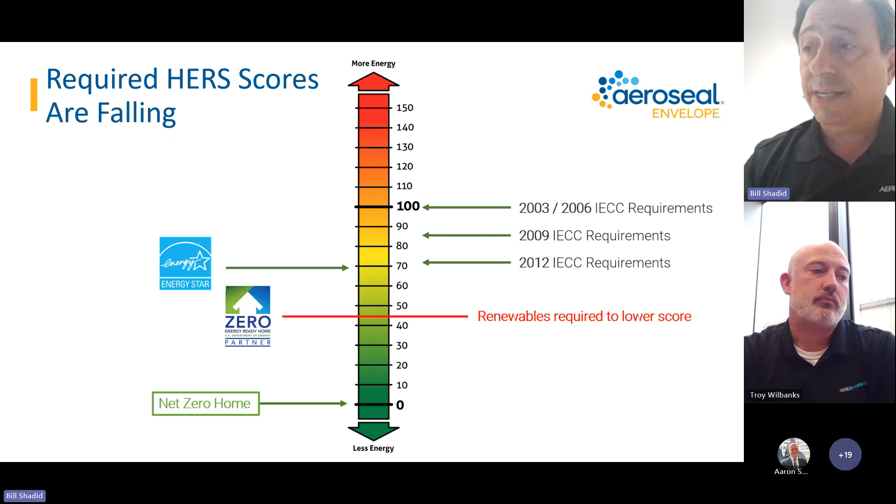When we think about HERS scores, that's a very common thing that we're used to looking at. When you look at the HERS scores over the years, they're falling. If you look on the right-hand side of the slide, the 2003 and 2006 IECC requirements had a HERS score of around 100. By the time we get down to 2012, it's falling. And to be zero energy ready, if we achieve a HERS score of around 45 to 47 and then apply a renewable energy source to that, we will achieve a net zero home. So that trend's been happening for a while. It just needs to get even lower to achieve net zero or zero energy ready. A good reference point for us.

Why are we talking about net zero now? Well, if you follow the housing industry, and this is both for single family and multifamily, demand for net zero is increasing. When we talk about net zero as a trend or the future, we like to say it's not the future, it's now. I'll show you a couple examples of that in a couple slides. But it's growing very fast. There's consumer interest and demand. There are increasing financial incentives, such as the Inflation Reduction Act that was passed about a year and a half ago. So more builders are actually including net zero in their offering to consumers or plan to do so in the very near future.

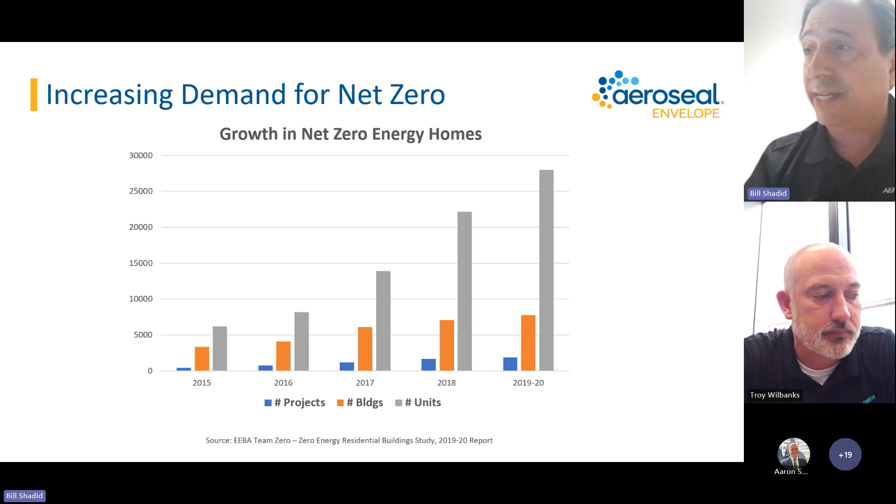Let's look at that real quick. This was some data from EEBA Team Zero, which is part of EEBA, so thanks so much for this great data. If you look at this chart, you can just see from left to right, going from 2015 to 2019 to 2020, the drastic increase in terms of projects, buildings, and number of units. What's really interesting to me is that the gray bar, the number of units, is actually growing faster than the number of buildings and projects. So what that says is you've got more multifamily coming into the spectrum. And that's really cool to see multifamily hitting net zero and zero energy ready. At the end of this presentation, we'll be talking about a very specific multifamily project.

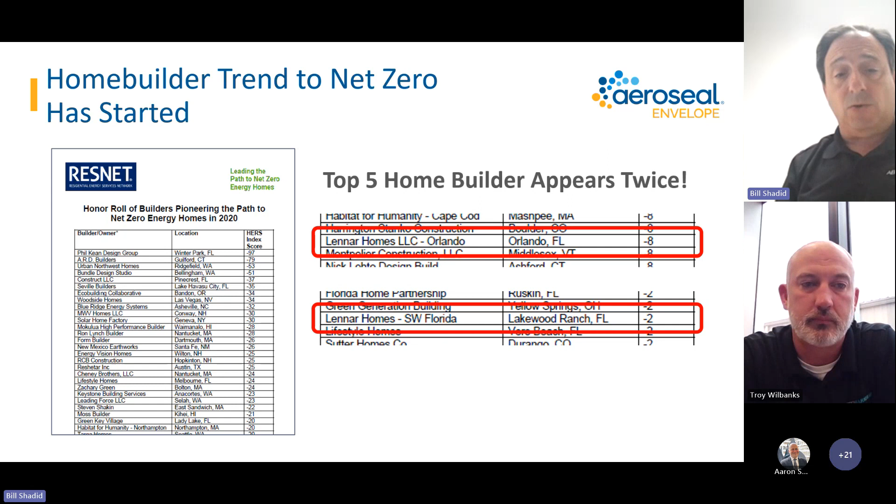Another thing I think that was really cool to see is that from RESNET, we looked at an honor roll of builders. This was from 2020. And what we need to look at here, I don't think is the detail, because it's a long list of builders that were actually pioneering and building some net zero energy homes in 2020. But if you look at some of the builders that are mentioned, there's a top 5 home builder, Lennar Homes, who's actually in that listing twice. So this isn't just local or regional, more specialty builders. Even the largest home builders are really taking net zero and zero energy ready seriously.

And that's actually supported very much by Beazer Homes, who's a big customer of ours. In 2021, in their ESG summary, they made a commitment that by the end of 2025 every new Beazer home will be zero energy ready and generate a HERS index score of 45 or less. And think about somebody who's building several thousand homes a year to make that commitment. It's a very, very big deal. And I think it says a lot of good things about where our industry is going.

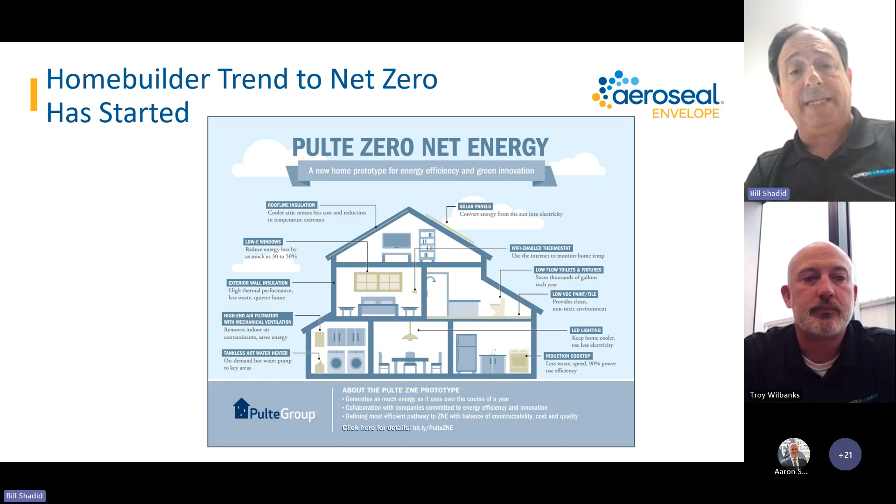Even Pulte has basically got content out on their blog and their website that speaks to what is net zero, how we're going to get to net zero. So again, some of the biggest home builders are really addressing this and moving forward with it. So it just speaks to the growing trend and the growing demand. And again, what we're going to cover today is how a tight building envelope can help you achieve the same thing. So I'm going to turn the presentation over now to Troy, who's going to take us through a number of slides around air sealing.

And Troy, just whenever you want to advance the slide, you tell me and I'll hit next. Perfect. Bill, definitely appreciate it.

So yeah, as Bill just mentioned, I'm going to cover air sealing the envelope. I'm going to cover it at a very high level, cover some of the basics surrounding what air sealing is, the control layers, what we need to focus on, some of the benefits and challenges, some of the questions, and then also focus on how proper air sealing can impact the build as a whole, the durability, as well as some areas where we can help address costs. So, Bill, next slide. Not the slide I was thinking, but let's roll with it.

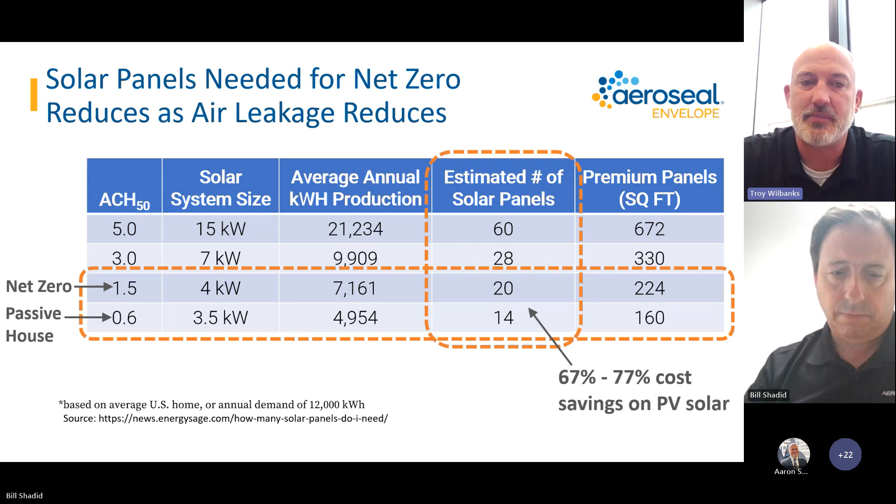So why is air sealing the building envelope so important? This was originally going to be the first slide to kick it off, but like I said, let's roll with it. So arguably, air sealing has the greatest impact on any build through the full process from design to occupancy. The DOE estimates that uncontrolled air leakage accounts for as much as 40% of energy use, which is a massive number. Now, that's the DOE estimate based on code-built houses.

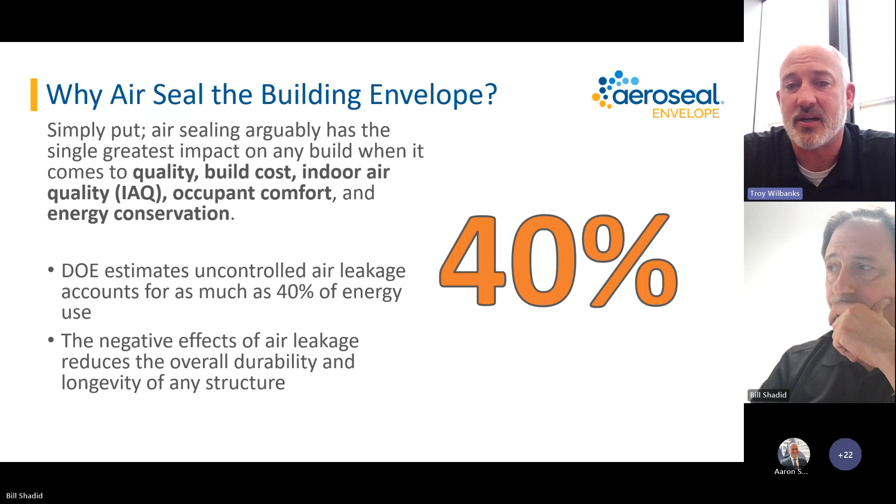When we're talking about net zero houses, that 40% is going to be knocked down to essentially zero. Net zero ready, depending on when the renewables are plugged in, is going to be drastically reduced. So air sealing the building envelope when it comes to efficiency is huge, right? And we can see that through study after study. Also, there's a lot of impacts, which I'll cover a little further, when we're talking about protecting the integrity of the build through the total ownership of the home, and also a lot of the negative impacts that can happen to a build if they're not addressed correctly. So next slide, Bill.

Beyond that, though, I like to call them the butterfly effects, if you will, of proper air sealing, and that's when we're really getting into occupant comfort, right? Building a structure and ensuring that the people that are in it really receive the maximum capabilities of that structure, whether it's living in, going to school, whatever that structure may be.

And a net zero home is going to do exactly that. So through proper air sealing, getting a really tight building envelope, you're going to have less pest intrusion, so less bugs getting in from the outside. Also, you're going to drastically reduce the transfer of smells and sounds.

This is huge in the single-family detached world, whether you're in a rural location or out west, dealing with pollen, or in some cases wildfires, or more of an urban area where there could be a lot more fumes from traffic floating around. That also then multiplies naturally in the multifamily type world, right? Where noise and smell are the number one and number two complaints by property management companies.

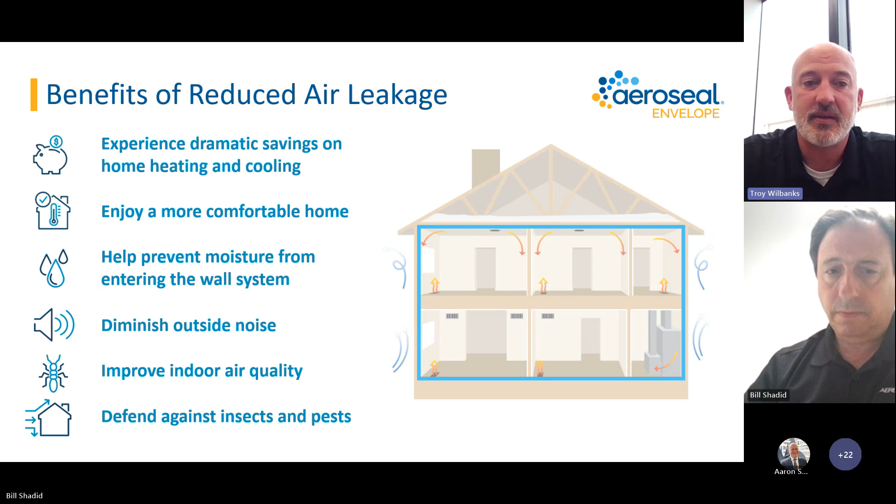Also, you cannot really buy that experience necessarily to identify where this air leakage is happening and properly air seal. So it's a huge challenge that we have, and we'll hop into it a little bit more in detail later on in the slides. But it's an interesting fact, and what this tells us is sealing the building envelope, coming up with an aggressive, repeatable air sealing detail that will address where the lion's share of air leakage is coming from, is a crucial component as you're approaching a net zero ready build. Next slide, Bill.

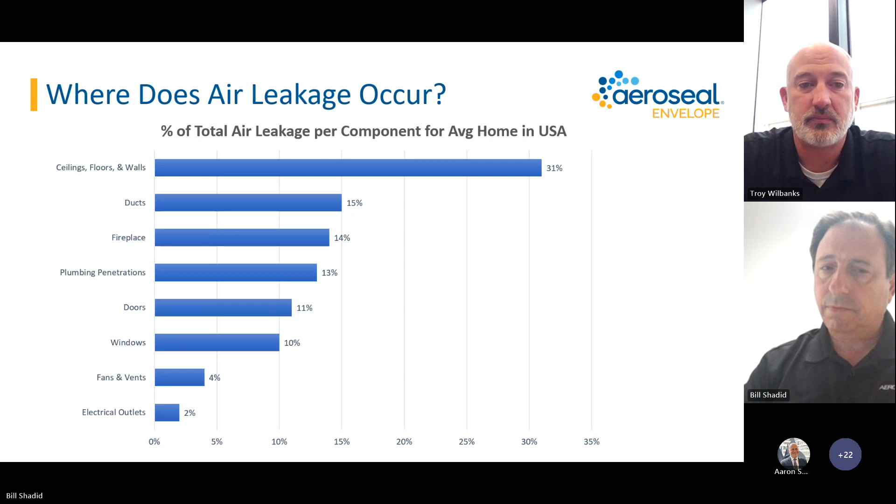But when we're talking about how tight is tight enough, there's really three things that we need to take into consideration. Well, first, from the building science view, every house should be sealed as tight as possible, but designed properly for it. So the first thing we want to look at, the very basic, is compliance requirements, right? For net zero ready, typically what we're saying is 1.5 air changes per hour. Are we developing an air sealing detail that's going to meet that? The next one is, okay, we know now that we're going tight, right? Especially compared to a code built house, we're going to that 1.5 air changes per hour or below.

Are we working with our HVAC folks? Are we working with our MEPs to make sure that the mechanicals are sized properly? Which, as we know, the tighter or leakier a build is compared to the proper sizing of the equipment, can have positive impacts or negative impacts as well. And the building owner's goals are huge.

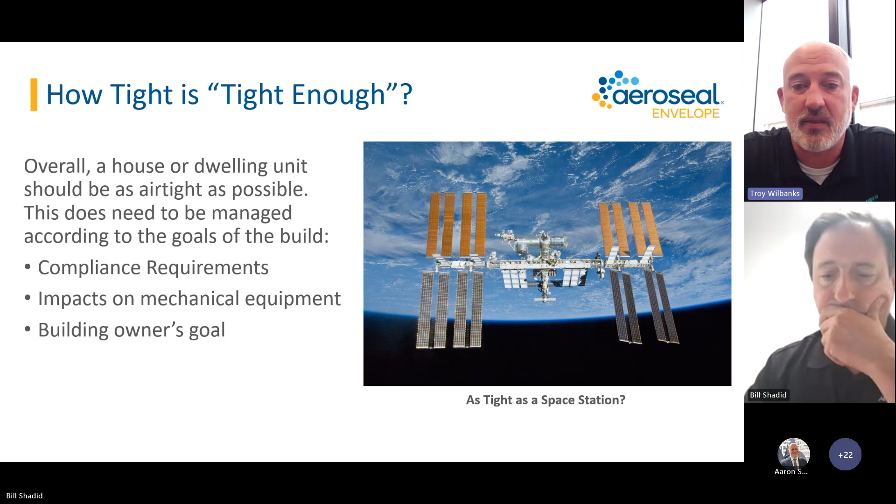So, there's a lot of impact that we can have on building owners' goals beyond just the efficiency aspect of a net zero build, which is going to sway them. It's going to convince them that this is definitely the way to go if they're not already convinced. So, next slide, Bill.

Yeah, one of the things that we need to address in any build, particularly when we're looking at a build that has the efficiency requirements for net zero ready, is providing a complete thermal enclosure. Really, addressing the four key components of that. Once again, this is pretty basic, so if anybody wants to go further in depth, feel free to throw in questions, or we can set up a time later to discuss each one of these. But really addressing first your air barriers, addressing thermal bypasses and preventing wind intrusion.

To that second point, air sealing, that's a broad topic. What are we air sealing? Is it the building envelope? Is it the ductwork? How are we doing it? Is it foam? Is it tape? Is it caulk? Is it spray foam? Are we trying to go with more environmentally friendly products, so we're eliminating spray foam? What does that look like? Excuse me. Also, advanced insulation.

With any net zero ready build, we're going to take a look at not only the advanced insulation, but any advanced air sealing detail that comes along with the scope of the insulation company, and also advanced windows. This is an area that I run into very often. We're sealing a house and we're wanting to get it down to 1 or 1.5. So we do some testing. We'll tape off the doors and windows and do some instance testing along the way.

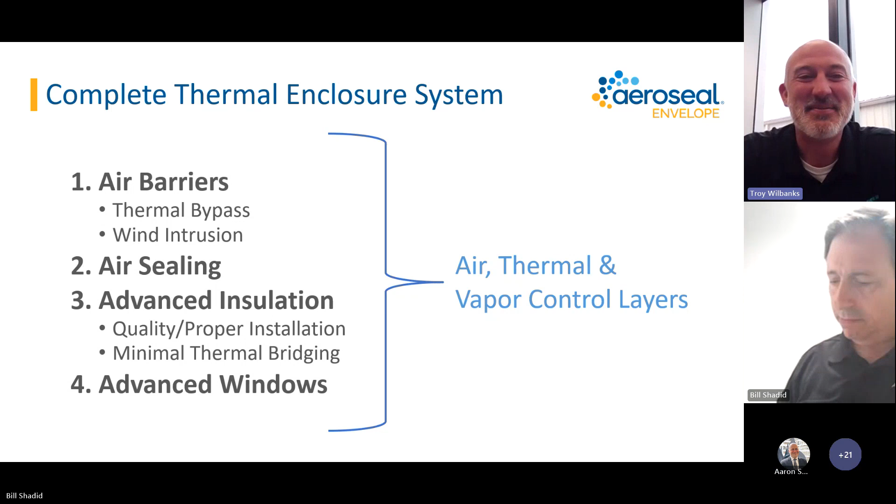Yeah, and then obviously, following on the coattails of that, from the building science point of view and the holistic approach to the build, we want to mitigate risk, and do that upfront as necessary in the design phase, and monitor it through construction. So first thing we want to address is bulk moisture. Bulk moisture can have just about as fast of a negative impact, short of intentional human action, right?

Then airflow controls comes in at that number 2 spot. The reason why it comes in that number 2 spot is because of the massive impact it has on the build as a whole, specifically number 3 and number 4. Your thermal control, so we're talking your HVAC and your insulation as well. Is it going to perform as designed? And also your moisture and vapor control, which is exactly that: controlling the amount of moisture and vapor that's entering and exiting the building. So, next slide, Bill.

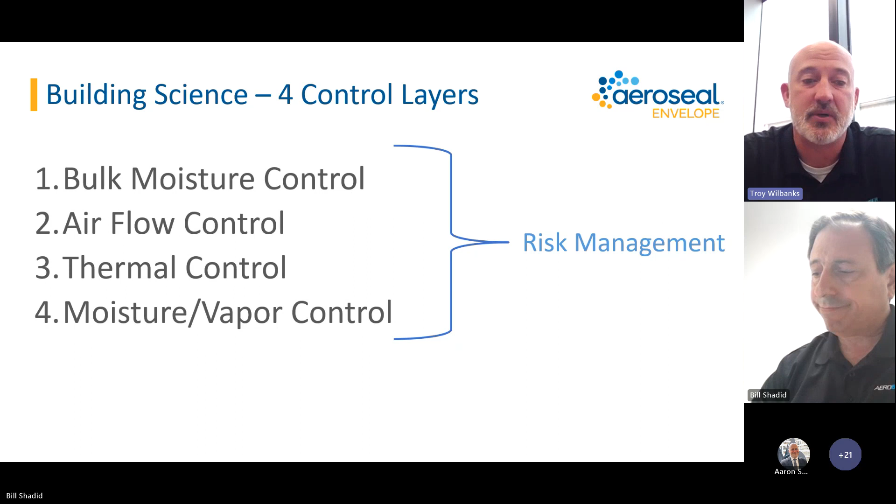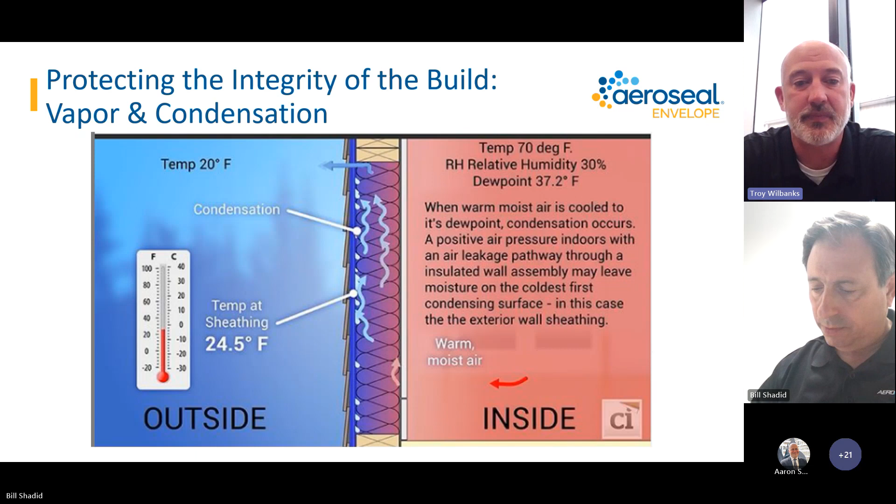Then the whole game changes, though, when we introduce air leakage. And in this example, it's something as simple as entering a 1-inch hole into the equation. You can think of that 1-inch hole as taking a jigsaw and literally cutting out a 1-inch hole. But what we're seeing in real life is typically death by 1,000 paper cuts. So this 1-inch hole is the accumulation of numerous different cracks and leak points that were missed during the manual air sealing process that add up, sadly, to way more than a 1-inch hole on the average house that we see.

But what does that mean during the same month time period when it is a 1-inch hole? Well, all of a sudden, that third of a quart of water turns into 30 quarts of water. And that's over that same period of time of about 1 month.

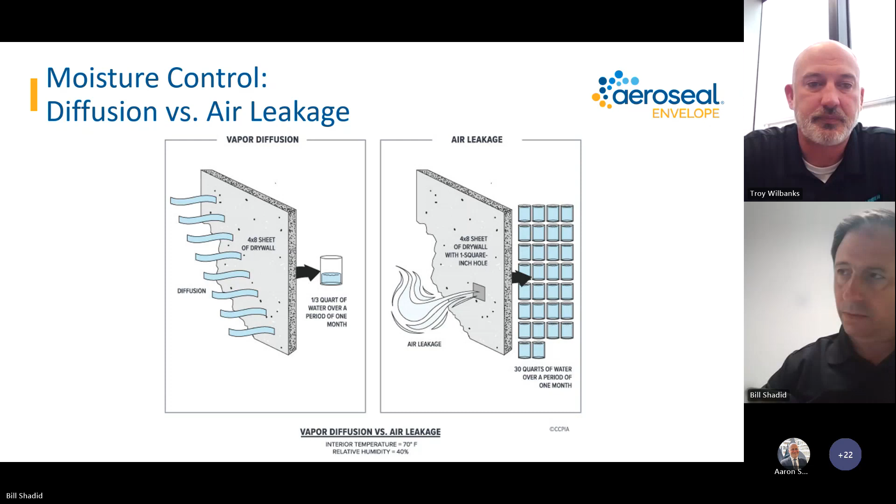If you took all those leak points and added them up, that gets tighter when we're looking at the 2015 IECC code, addressing it down to a 13 by 13 hole, 2018, 10 by 10. When we're talking about a net zero or net zero ready house, that 10 is looking more like a 3x3 or a 5x5. When you take all the leak points in a house and add them up, that is a small, small hole. Now, naturally, if you ask the person that you were building a house for how big do you want the hole in your wall, they would say they don't want a hole, period, right?

But that's essentially where we're going with net zero ready: reducing that air leakage to a smaller and smaller amount, to improve the efficiency of the build and maintain that efficiency throughout the life of the structure. Also, the butterfly effects that we talked about before. But if this is the direction that you're looking to go right now, you definitely need to start preparing. And if it's something that you're kind of just watching as far as when is code going to require it, it's going to require it sooner than later.

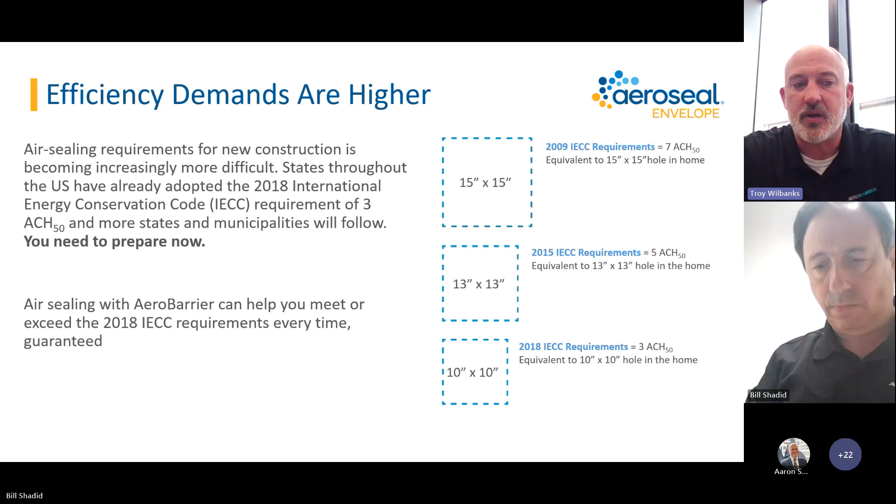So addressing a lot of these issues with air leakage, the one thing you really can't buy at a store, is going to be crucial. And addressing them now and coming up with an action plan, the necessary steps to achieve these goals, it's gonna benefit everybody exponentially moving forward. So, next slide, Bill.

Challenge with air sealing, there is a lot. The number one challenge that I hear about is the trades. And I don't want to talk negatively about any trade at all. It's just the reality of it. It's not anybody's primary scope of work. Yes, your insulation company will have an air sealing line item attached. There's expectation for the plumbers and the electricians, but it's not their primary scope of work.

I mean, an electrician didn't become an electrician with the vision of walking around a job site air sealing, any more probably than anybody attending this webinar today chose their profession and worked really hard to achieve the level in their career that they're at. You didn't start out thinking air sealing. That just wasn't part of it. So since it's not somebody's primary scope of work and it's hard, it gets missed a lot. It really does. Chasing air is the analogy people use to describe other things that are hard, but in this case, we're actually chasing air.

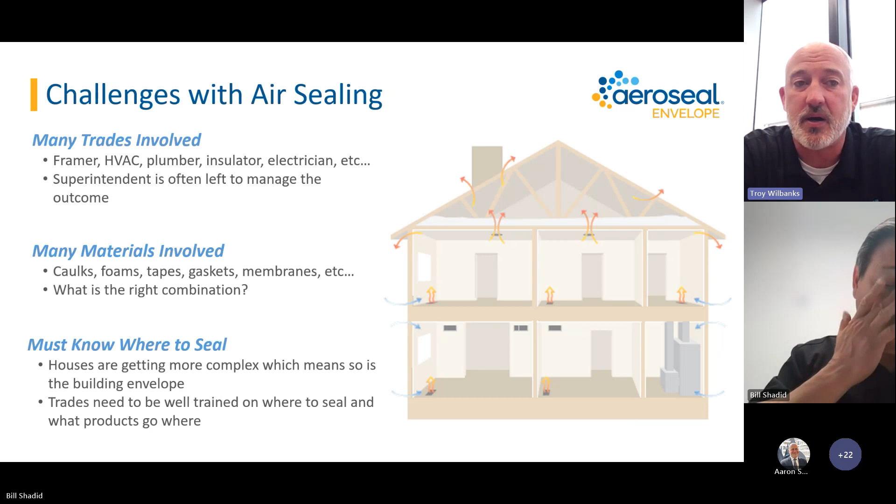And along that, there's a lot of other challenges that a lot of folks are familiar with. What materials are we using? Caulks, foams, gaskets, is there compatibility? What caulk are we using for a bottom plate? Going back to the trades, are we sweeping or bringing in a blower to get rid of the drywall dust to make sure that the caulk actually adheres? What combination are we looking at, and also knowing where to seal. It's a huge challenge. Obviously we focus a lot on the exterior walls, but you would be amazed at the leakage on interior walls as well, in door jambs and whatnot. So next slide, Bill.

Overall, though, getting it right really, really matters. It matters on any build, but when we're talking about net zero type structures, it matters even more. The effort that we put into this is extensive. The costs that we put into this really, really matter. And failing that blower door test at the end can really compromise everything.

If you've been on a job site during a failed blower door test, it's not a pretty thing to be a part of. Lots of finger pointing because it's nobody's primary scope of work, and rework can be extensive. Ripping out cabinetry, baseboards, rolling back carpet, additional sealing. It can get pretty extensive. So, next slide, Bill.

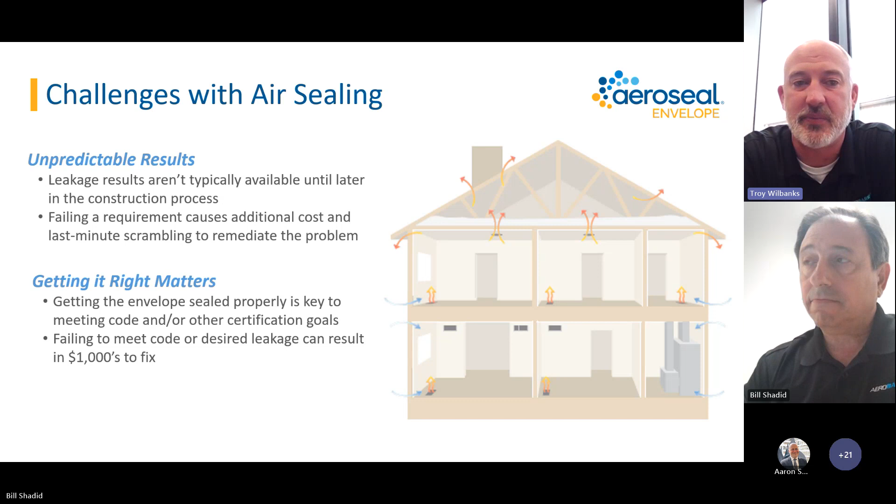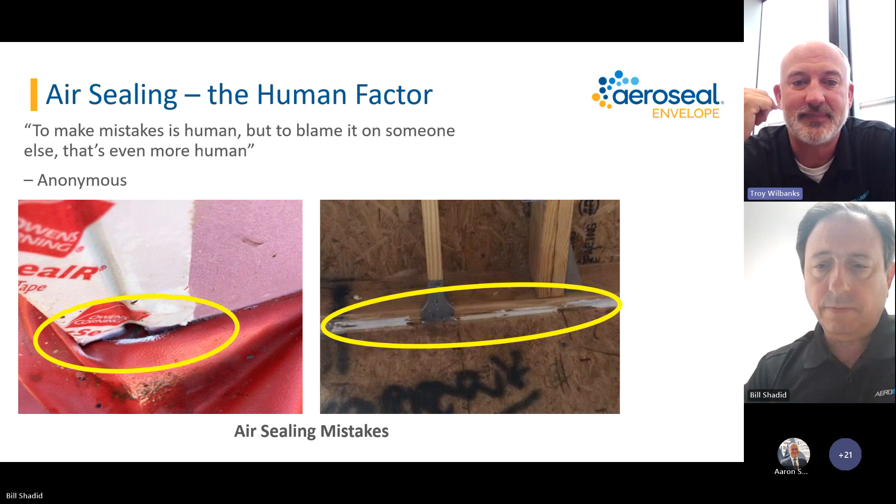When you flip a switch and the light doesn't turn on, you call the electrician. When you fail a blower door test, in traditional builds, there's not necessarily one person that you call. So managing that is challenging. Next slide, Bill.

Here's why. The air sealing detail is crucial to execute on, to ensure that this house passes the blower door test, is verified, and is truly a net zero house. Letting people know that this is wrapped up in their primary scope of work, they will focus on it better. They will do a better job.

When we see individuals, break it down to the human level, that are doing a really, really good job, reward them for it. Kind of put their name up in lights. Who doesn't like that? Encourage them in pre-con meetings to exchange best practices with the other trades. It can go a long way.

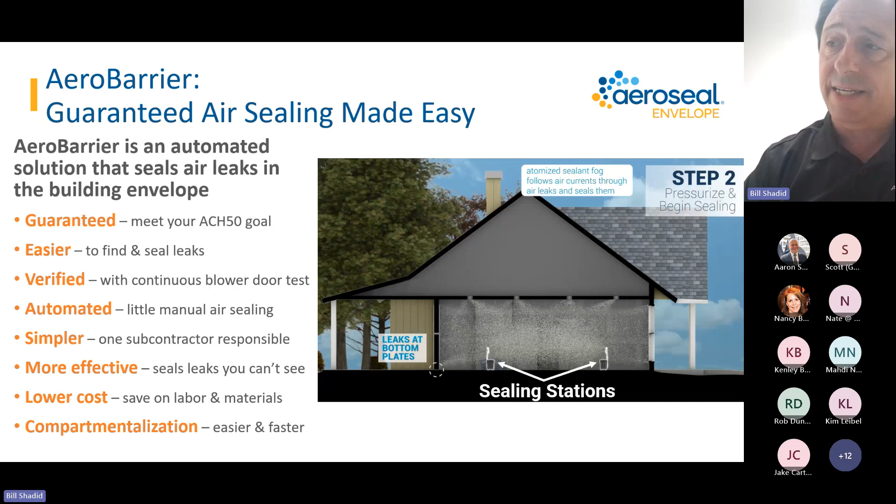What I'd like to do now is just show you a short video. It's just about 3 minutes long, and it's a computer animation that really explains how AeroBarrier works. So I'm going to go ahead and play that, and then I'm going to narrate it a little bit as we do so. So what we're trying to show here is a single family home, and I think the video is going to catch a little bit when we first start, but then it should smooth out.

We're essentially doing some prep work. That's our first step, where we're covering designed mechanical openings or a fireplace opening or any area where we do not want sealant to get into. And we're typically applying right after drywall and the first coat of mud, although we can also apply AeroBarrier before drywall, depending on where you want that air barrier or the air sealing barrier to be.

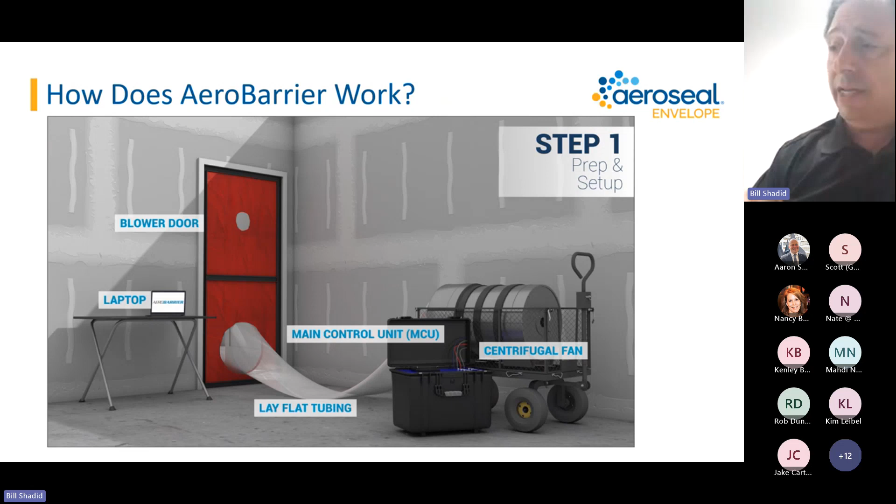Next, we start to bring in our equipment. We bring in sealing stations and distribute those throughout the home's interior. We're then putting our equipment on an exterior entry door. It can be from inside the garage or through the front door, side door, back door of the house, depending on the house's layout. It includes a main control unit, a centrifugal fan, laptop, some lay flat tubing.

Now we're going to pressurize the house. I mentioned earlier, we're applying higher pressure air to inside the home. So you'll see now the blue arrows represent basically air going into the home and pressurizing it. You can see it kind of going through windows and some leaks because that air, again, is going from higher pressure to lower pressure, and it's doing that by going through the leaks. We set up a Wi-Fi mesh network. That's really important because now we're controlling every seal station from the laptop and main control unit. And then we begin emitting sealant into a mist or fog into the space.

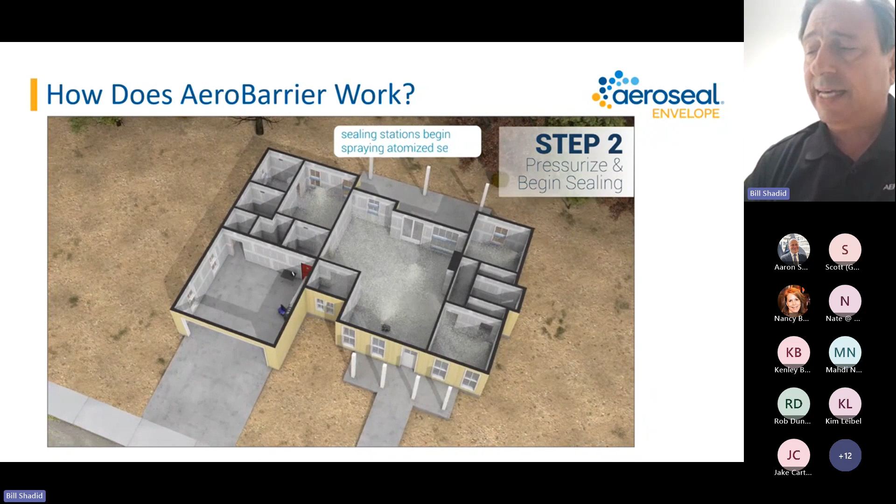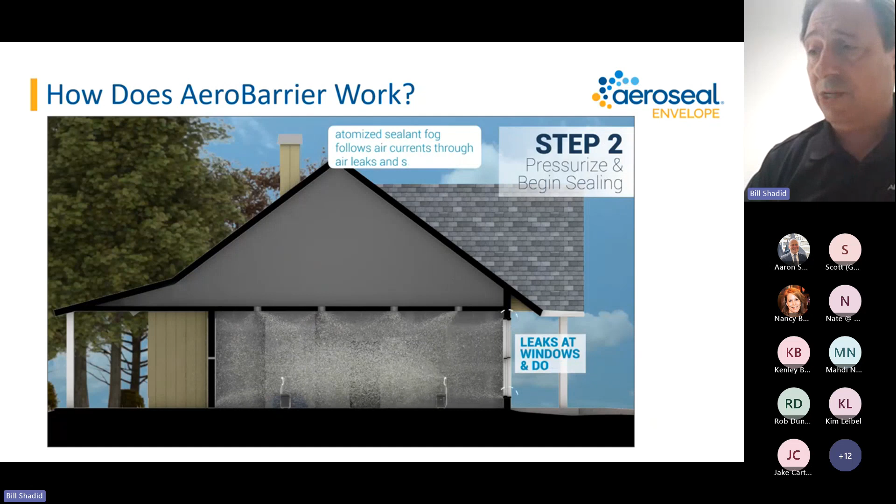You'll see next in just a second that same house section, and you'll see at the top or on the right where the sealant is going through the leaks into the outside or into the attic, and then quickly, actually, I should say, those leaks are sealed, so the sealant no longer passes through. It can be windows and doors, electrical outlets, can lights going into the attic. We're also, as I mentioned before, running a continuous blower door test. So we're able to actually every 60 seconds report where you're at from an ACH50 standpoint, and that allows you to know where you're at versus your requirement.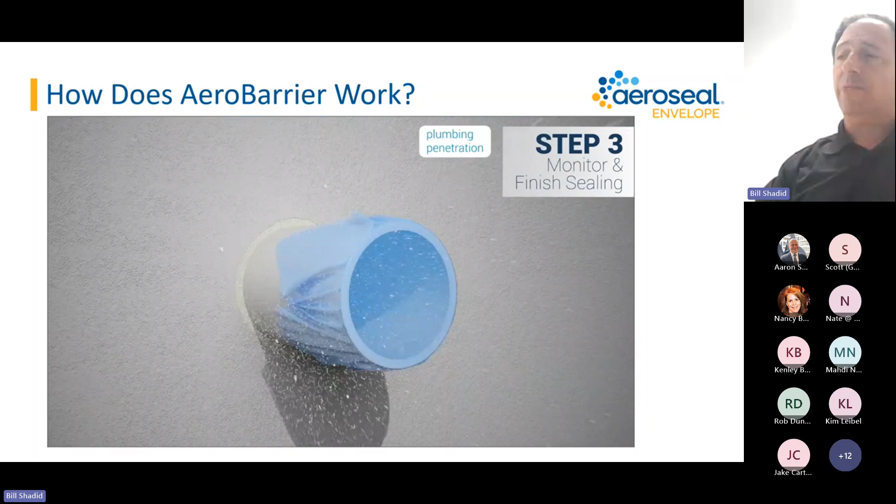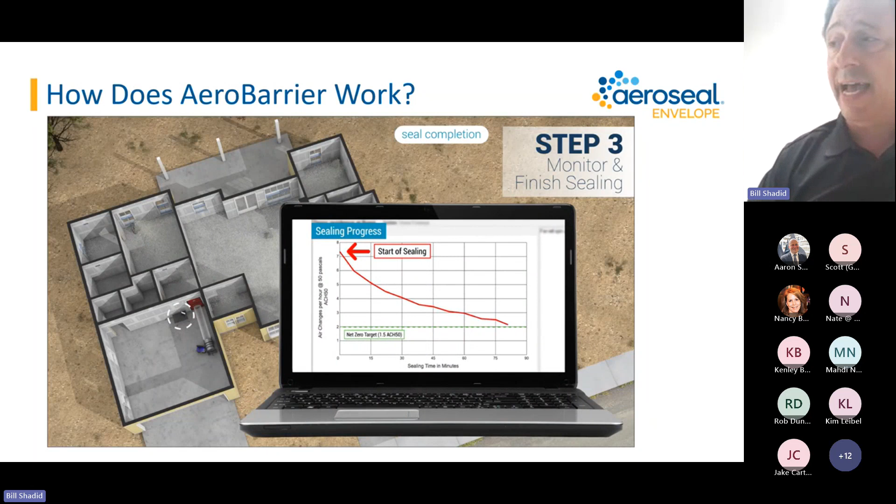Here's some close-ups of how the sealant gets pulled into a leak, an electrical box. Here's underneath the sill plate. The next example will be either a plumbing penetration or electrical conduit penetration through an exterior wall. So you can see the air current that's just going outside to get to the lower pressure carries our sealant, and it sticks and plugs that leak. Our sealant will not stick to anything but the leaks. We can have a separate conversation about the physics and chemistry that make that happen. Essentially, as I mentioned, we're reporting those results every 60 seconds, showing that you hit the goal. Actually, the goal for this test animation was net zero.

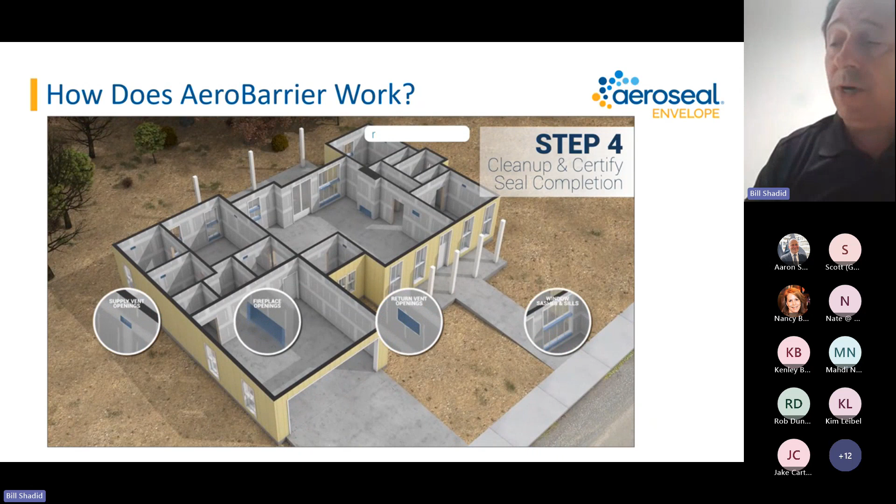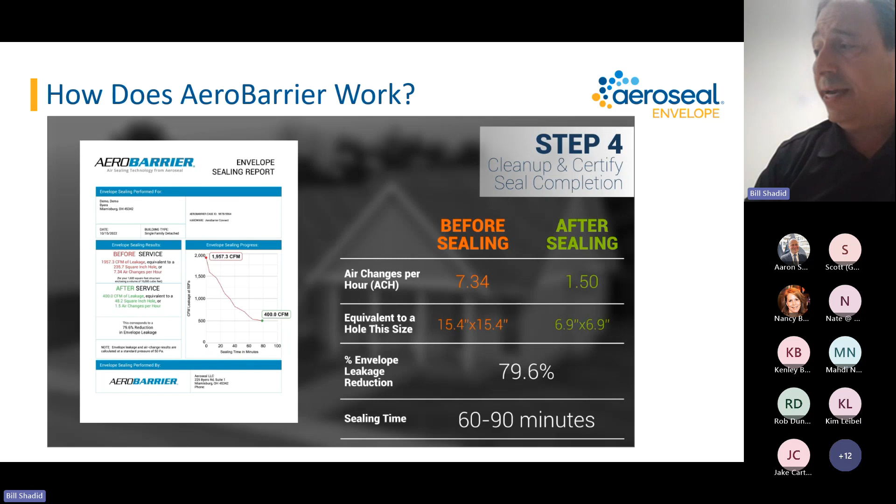Now we remove the prep work that we had put over designed openings where we didn't want sealant to get in, remove our equipment, and we're done. When it's all said and done, you get an envelope sealing report that shows you where you started and where you finished. In this case, in this home, the starting ACH was 7.34. We got it down to 1.5. It's about an 80% reduction in air leakage. So I think that video does a nice job of giving an overview of how AeroBarrier works.

And then just finally, very quickly, then we'll jump into case studies. We do serve customers in these market segments: single family homes, multifamily homes, and even commercial buildings, including some very, very large commercial buildings.

And we are both US, Canada, as well as international in terms of where we're doing air sealing today. So now let's get to a couple case studies that are really good examples of how getting a tight envelope helped a builder achieve net zero or zero energy ready.

In this case, it's Mandalay Homes in Arizona, about 45 minutes to an hour north of the Phoenix metropolitan area. They build a lot of zero energy ready homes, but just a couple, 3 years ago, their goal was really to determine the best path to achieve zero energy ready for literally every home they built. Okay. And they did a lot of analysis and a lot of modeling, and they concluded that if they could get a tighter building envelope, that would enable them to achieve net zero and make it available even to a production level home.

So they compared AeroBarrier to other methods of air sealing, did choose AeroBarrier, but the results of this then were they were doing a pretty darn good job of air sealing their envelope down to 3.1 ACH50 before they applied AeroBarrier. But AeroBarrier was able to get them down to 0.6 ACH50, which is well below the 1.5 that is normally targeted for net zero or zero energy ready. 0.6 is a Passive House requirement.

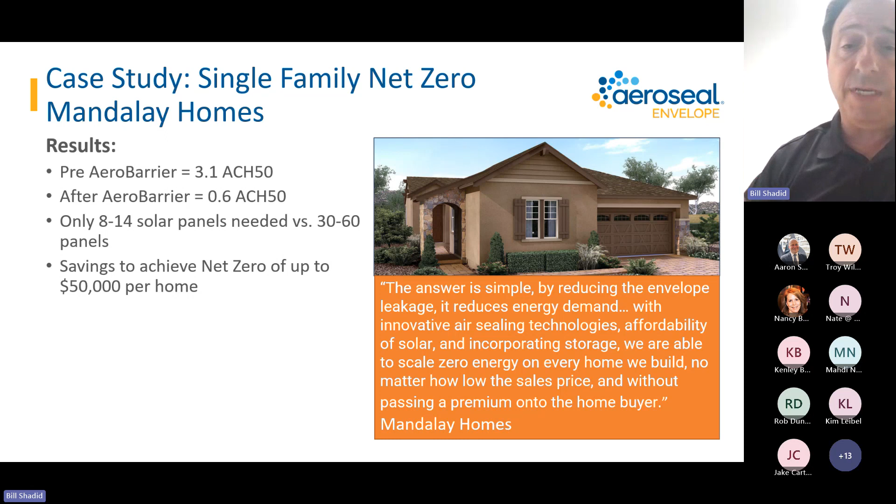What that allowed them to do is really only need to use 8 to 14 solar panels versus 30 to 60 solar panels. That allowed them to achieve savings of up to about $50,000 per home in capital costs, and therefore allowed them to offer these homes to even the average American home buyer.

Next, let's look at a multifamily project. This was a really interesting project in Utah, 600 units, so not a small multifamily project. And their goal from the outset was to try and achieve net zero, and they wanted to be all electric if they could. The project is called Soleil Lofts, and the client was the Wasatch Group, the developer and builder. We actually had a quote from them talking about how getting a tight envelope was, for them, the most affordable and effective way to get to net zero. And so you can actually see that on the lower right of this slide.

But again, they determined that they needed to cut energy consumption in half to be able to meet that zero energy ready requirement, the performance target. And they did a lot of extensive energy modeling. They looked at appliances and lighting and other things, and it showed that air sealing the envelope was the best option. They then concluded that using AeroBarrier to air seal the envelope was the best option for them, and that's how the project proceeded.

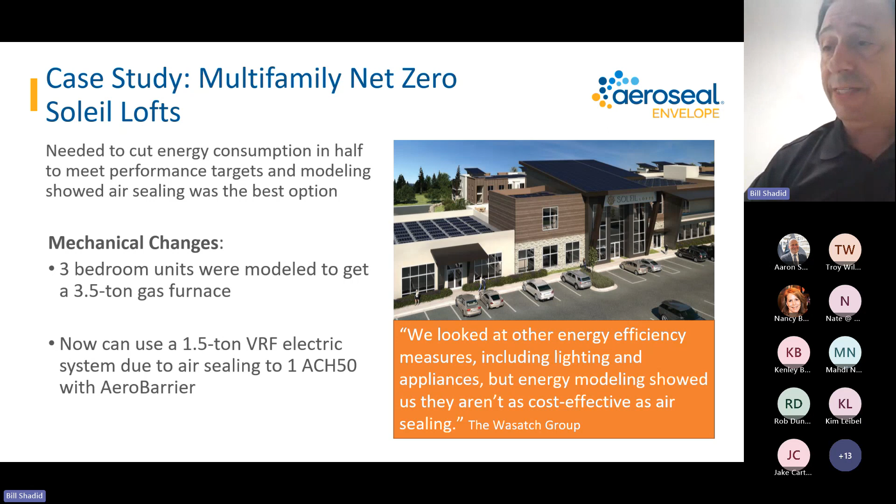So they were able to take their typical 3-bedroom unit, which had been designed and modeled originally to use a 3.5-ton gas furnace. Once they were able to get the exterior envelope down to 1.0 ACH50, or just a little bit under, we hit a minimum of 1 ACH50 and sometimes just a little under on every one of those units. They were then able to switch over to a VRF electric system due to that air sealing, and that went down to 1.5 tons. So the results were, again, we sealed down to 1 ACH50 or slightly below on every unit. They used that smaller system, and then were able to go all electric.

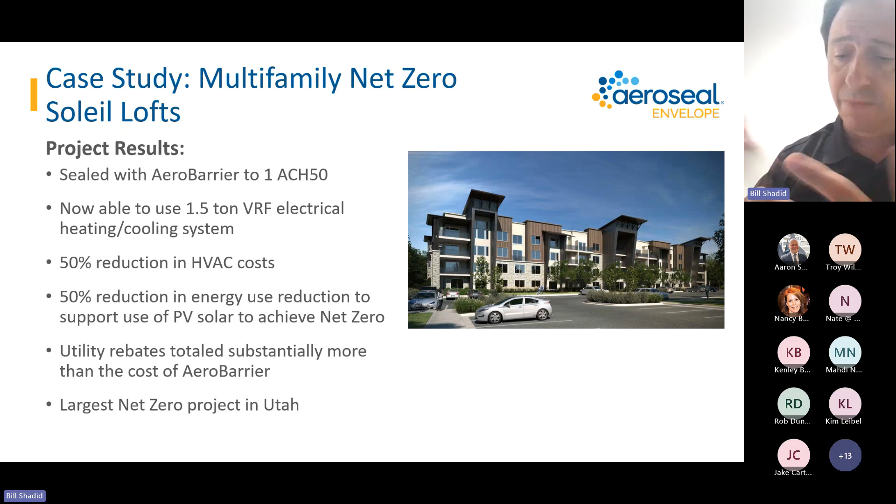It saved about 50% in actual HVAC cost, provided a 50% reduction in energy use, and that allowed them to afford to put photovoltaic solar on the project. They happened to have utility rebates for where they built in Utah that ended up totaling substantially more than the cost of AeroBarrier by getting the exterior envelope down as low as they did. And it became the largest net zero project in the state of Utah. So again, 2 different projects, single family and multifamily, for how you get to net zero effectively with a very tight building envelope. I hope that was a couple good illustrative examples.